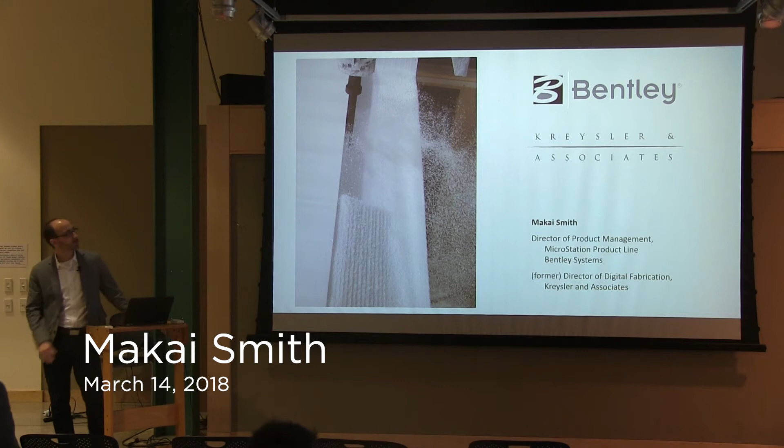So, as you know, I'm filling in for Bill Kreysler. So this presentation will be a little bit bifurcated. He gave me a set of slides. I'll speak to them, and then I'll follow up with a bunch of the work that I did there, which actually now has been almost 10 years that I've been at Bentley Systems, first in generative design and now kind of running our flagship product, MicroStation.

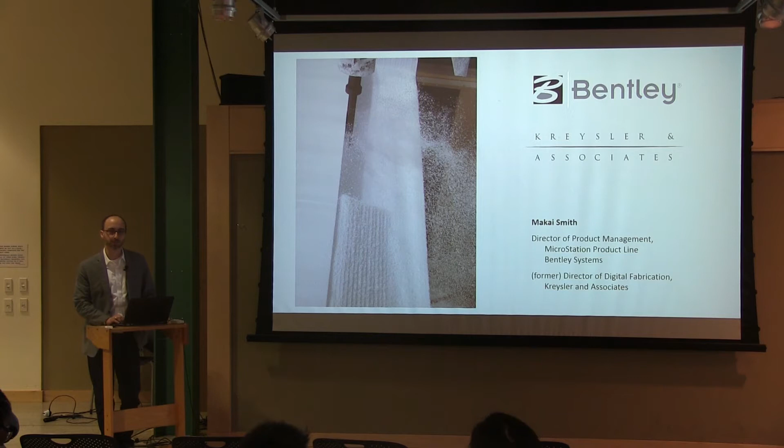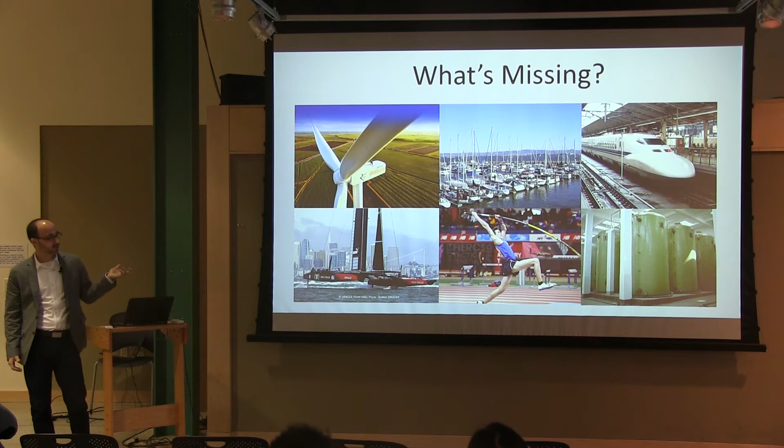So I'll just launch right into it. So you'll see composites have made quite an impact in a lot of industries, and they've found some really good application in things like windmill blades and boats because of the ability to take certain shapes and be resistant to difficult environments like salt water. High performance materials like carbon fiber for pole vaulting and for sailboats. And in industrial applications, these big tanks wound on a mandrel.

But what's missing from this, obviously, is buildings. And it's a shame because the building industry is really big. So there's a tremendous opportunity for the use of composites in architecture. But there's a bunch of reasons why they aren't. And knowing them, thinking about them a little bit, helps open up the possibility to change this stuff.

So one thing about the building industry, as you know, or will come to find out when you go to build buildings, is that they're built a lot like movies are made, where a guy knows another guy, he knows another guy, and pretty soon 300 people are working on a project together that have never seen each other before, and when they're done, they go away and never work with each other again. And so it's a fragmented industry. It's subject to varying different kinds of methods of construction by geography, by the politics of the jurisdiction, and all sorts of stuff like that.

And it's also built to resist change because municipalities are very risk averse, and the governing bodies themselves are governed as much by anything from politics and moneyed interest to councils of people, and you go and plead your case, and they kind of protect entrenched industries too. So getting architectural applications of composites has been slow going.

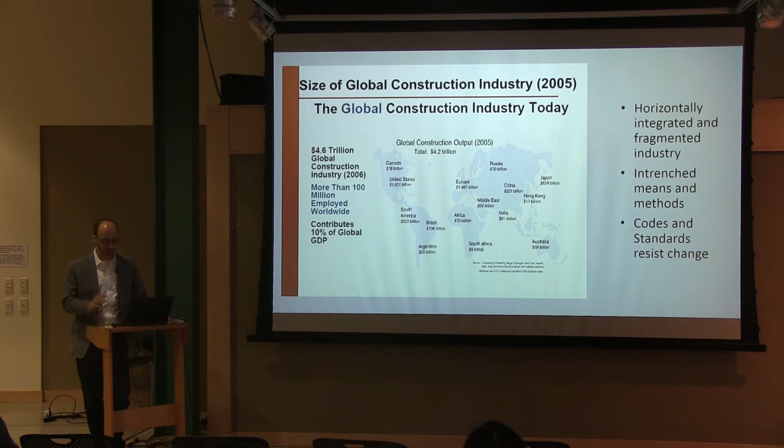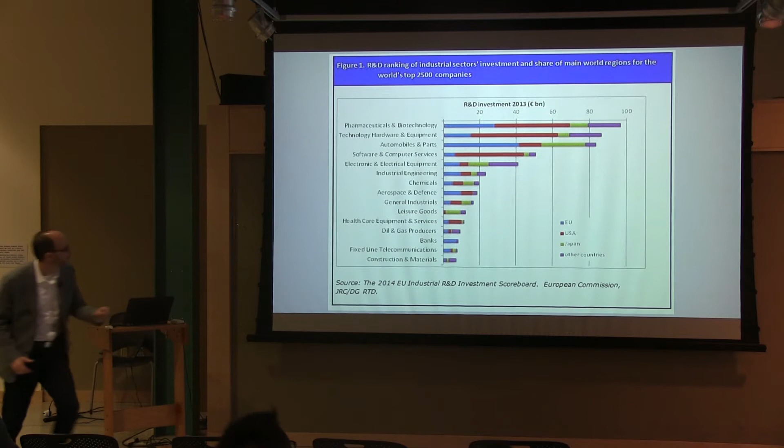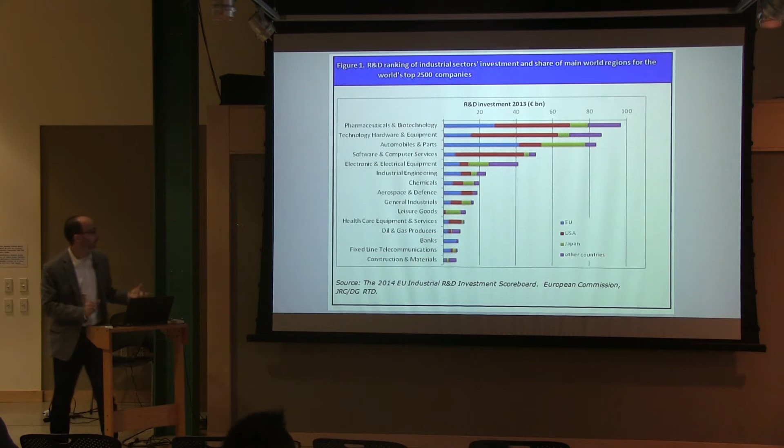One of the problems is that the building industry lags behind lots of other industries in its actual research. This little chart shows the share of R&D by different industries across a bunch of countries, and you'll see, here is the top 2,500. Here's the U.S. So there's a lot of work to be done there, just in terms of the basic research into application of new materials.

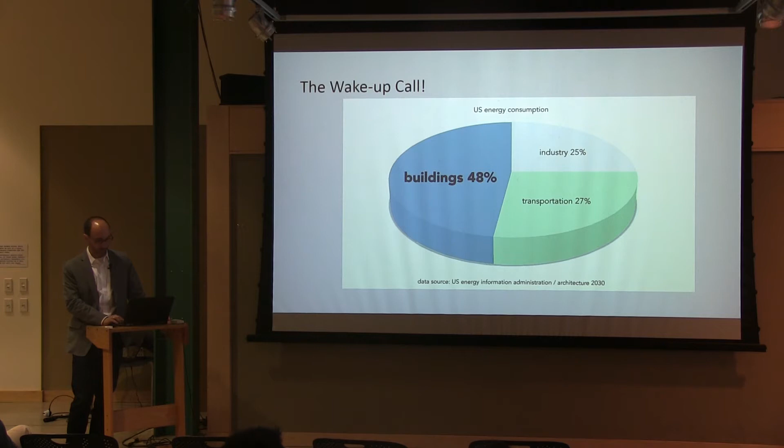And a little bit of the call to action, which is that as an industry, the building industry is terribly inefficient and has fallen off the curve in terms of productivity gains. So, well, why would that matter? I mean, if your firm stays in business and whatnot, why should we want it to be more efficient? One of the reasons is that buildings themselves are really inefficient. And so there are lots of problems to solve, and architectural composites are very uniquely suited for some particular problems in buildings.

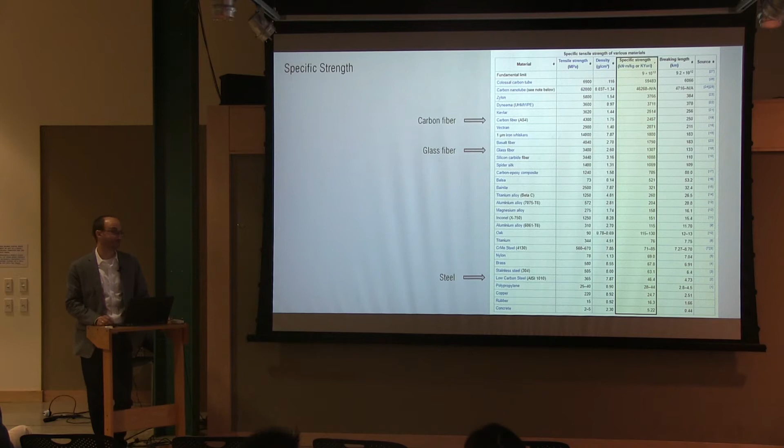So a couple of things about composites. They're incredibly strong, but in a particular way. So this specific strength is sort of strength to weight ratio. So they are very strong for how much they weigh. And just comparing them to steel. Carbon fiber is like the famous one, but glass fiber actually isn't that much worse. It's not quite as stiff, but it's a lot less expensive. So you won't find carbon fiber used much in buildings outside of some of its particular properties.

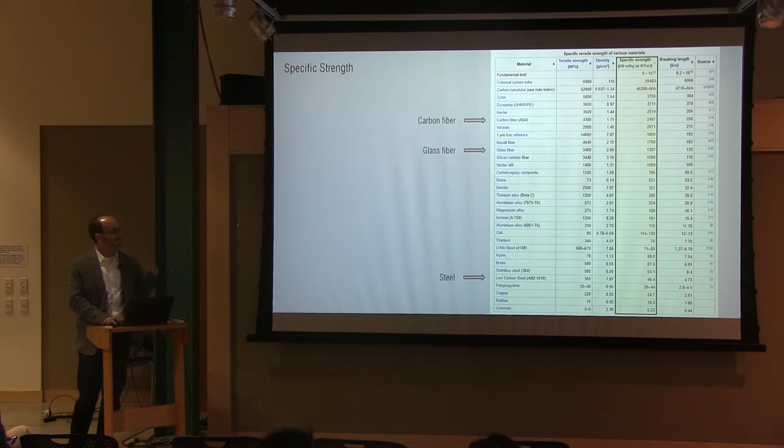The thing to know here, it's not on the chart, but keep in mind, the other thing is modulus of elasticity, which is like how stiff things are. Steel is really stiff. Composites can be pretty bendy. And so the trick is to combine the two and to speak to the different properties of the two materials and smartly design composites, actually being the resin, the cloth, and the structural reinforcing in it.

So Bill Kreysler has been a board member, a former president of the ACMA, which is the composite kind of body, right? They've written this guide, and it informs the building codes, and it's beginning to be accepted. So you are now seeing large-scale application of composites in buildings outside of the anomalies.

So I'll show you a few projects that are in construction or constructed as some examples of good uses of composites. This is the 1000 Museum Zaha building in Miami. And in this case, the design team wanted a composite, so this shell here is composites, right? And the proposal was this backup structure, right?

Because you need it, because it's going to be really wet and humid in this room. And so the drawings that they brought to Kreysler and Associates showed this steel frame on the left. But one of the difficulties, and I'll say this again and again in this presentation, is that this is a material very much unlike most of the other things that the architects have any experience with. So the designs for them can be really well-meaning but very naive, right?

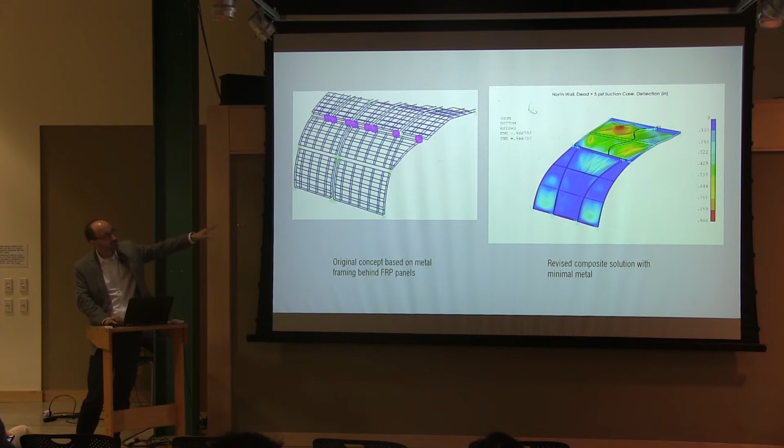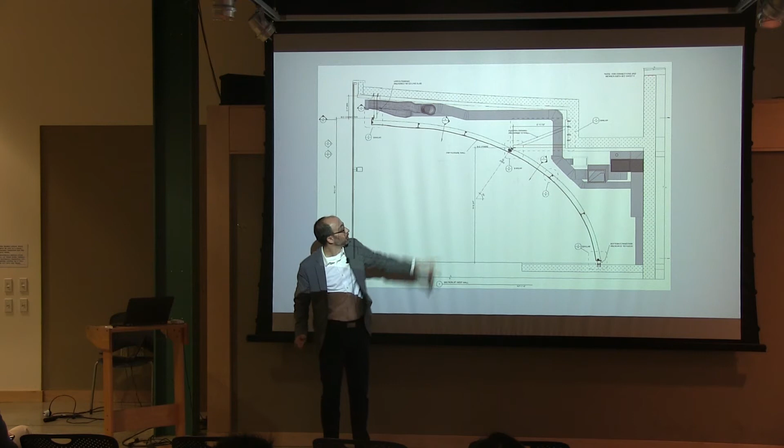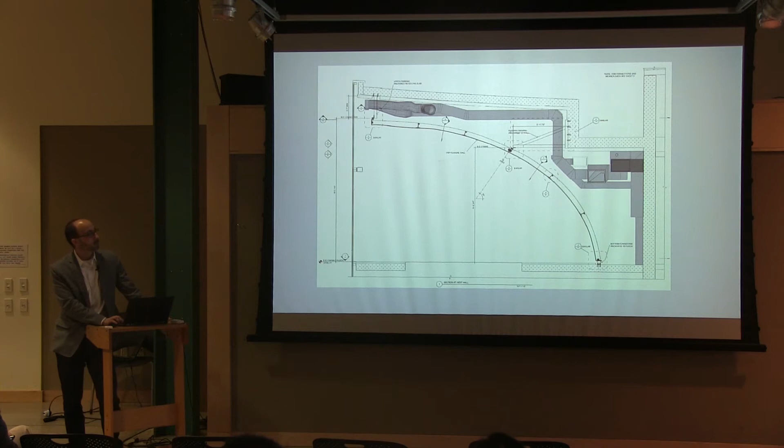You don't need this kind of structure. The panels themselves are strong. So with a little bit of finite element analysis, they got it down to this drawing where you can see the panels span and there's nothing but the kicker, so it's only supported in one place. And the panels have shape to them, so they resist flexing, and off you go. And you saved both construction time and you saved a great deal of steel, which not only do you have to buy, but you also have to support with the rest of the building.

This building also shows a much larger version of the same lesson. This is the San Francisco Museum of Modern Art by Snøhetta, and the contractor is Webcor. And with Enclos, Kreysler and Associates did this facade. And one of the big challenges in composites in buildings is fire resistance. It's a combustible material. You can control it, but you can't get away from it completely. And so sometimes you'll see a glass fiber reinforced concrete, GFRC, rather than fiber reinforced plastic, FRP. I'll use those, FRP. It's an easier way to say it.

But some of the things about this building, it was originally designed by Snøhetta to have GFRC panels because of the fire resistance and because of the familiarity of working with concrete. But GFRC is not strong in the same way that fiberglass is. It wants to crack, so you need a steel structure behind it. So by using FRP, the panels themselves are so much lighter and so much more structural that you don't need a steel backup structure. So they were actually going to have the weather wall, an air gap, an outboard steel structure to support a set of GFRC panels.

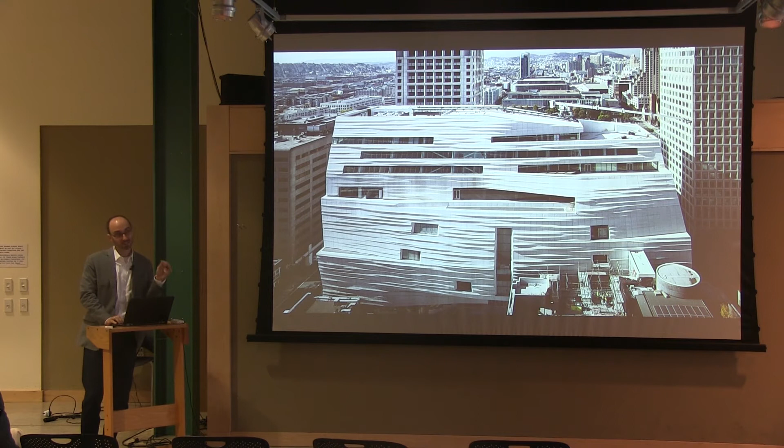And the tower crane can reach farther, so you don't have to move the tower crane or build as big of a tower crane. And Enclos did modular panels, so the FRP is not separate, it's with the interior panels. So Webcor only had to go around the building one time. The whole facade was put on in a single piece. So in a congested site in downtown San Francisco, you don't have to stage something twice. You don't have trades running into each other. So oftentimes it's the system effect of using a material like this where its efficiency comes, because it might be more difficult to do in some ways, but you just have to know where to apply it.

A couple of other applications. Here's the Bing Concert Hall. All of the interior panels are FRP, and they're backed up with concrete, so they pour concrete into the molds before they're demolded in order to get the acoustic performance of the panels.

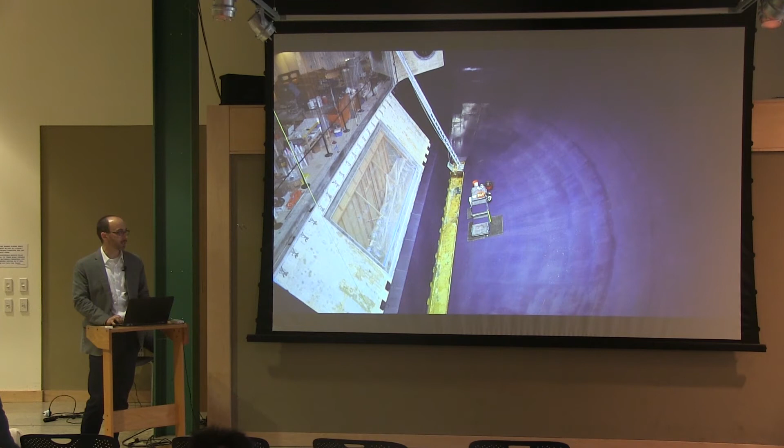This is the Monterey Bay Aquarium, and the interior of this enclosure for sharks, I think, is glass fiber reinforced polymer. And instead of filling the resin with talc, as is often done to make it softer and more workable and less expensive, it was filled with a harder mineral so that it can stand up to the scrubbing that needs to be done on the inside of tanks. So the material itself can take on a great number of characteristics by what you do with the resin.

So a few projects that are in proposal or on the books or in construction. This is a rendering of a boathouse in Tulsa. And oddly, Bill said this is one of the most difficult projects that they have ever done, because this wireframe, this is a rendering. That wasn't built. So all that's actually there are the columns and the panels, which means the panels span a couple of bays between columns.

So the panel joints are structural, like semi-structural, and so they're having to figure out all the deformations of it. No two panels are the same. So you can make this stuff as complicated as you want.

Another interesting project, this project went on for a great while. I was at Kreysler & Associates during the time it was in design, and they finished it just after I left. This is a private residence on an island in the bay, and it's a monocoque structure, so there's no interior structure. If you went down into the hull of a boat, you wouldn't find columns, right?

The shell of the boat is the structure of the boat. So like the piece on the right, if you flipped it upside down, it would float. It's like that. It's like a single fiberglass structure. So you can do monocoques if you're able to design them and if you're able to get them permitted.

This is just a research project done at CCA. And what they discovered here was that you can get different kinds of marine organisms to grow by the shape of the underside of this piece.

A piece by Achim Menges, I think it's a pavilion in Stuttgart, and these are ETFE panels. I think they're thermoformed, and then he's laying the fiber, this is like carbon fiber tape placed by this robot arm on the inside, using the bubble as a formwork, inspired by, I think, these spiders that blow little bubbles and then build a web inside them.

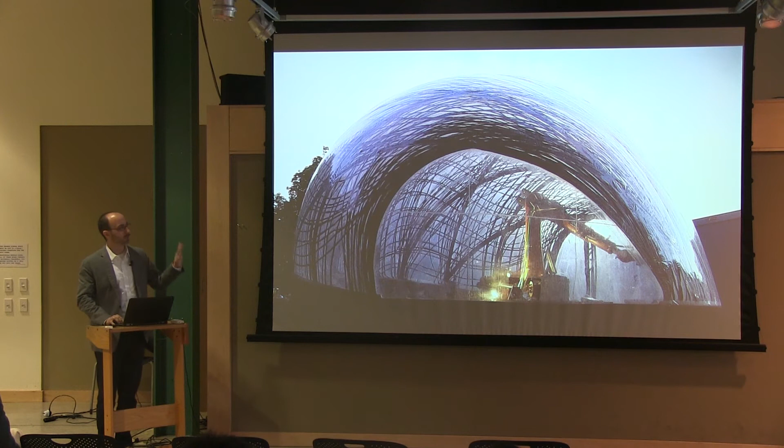So it's a very adaptable material that can be placed, you can put the structure exactly where you need it. That's, I think, the lesson in this, right? One of the many lessons. And this is a project that's on the books. It's going to get built, the Lucas Museum of Narrative Arts.

And I wish these renderings showed more closely the surface finish, because it's going to be essentially a glass terrazzo. So the gel coat, we'll get into what gel coat is in just a second. The gel coat is going to be glass and then done like terrazzo, so the whole thing will have a real shine to it. The rendering actually is sort of accurate in that case.

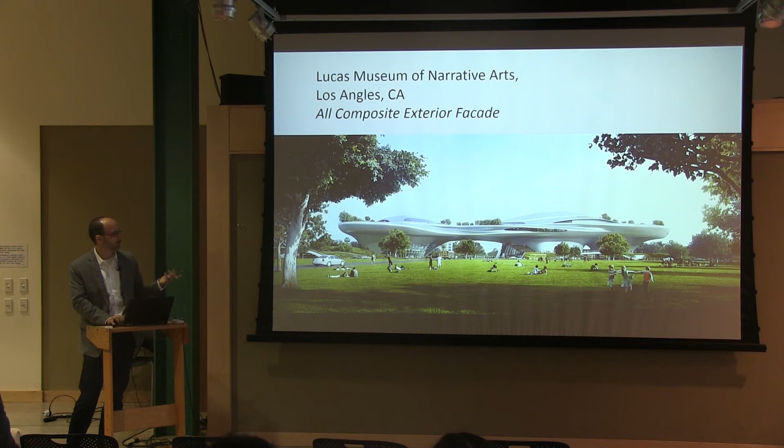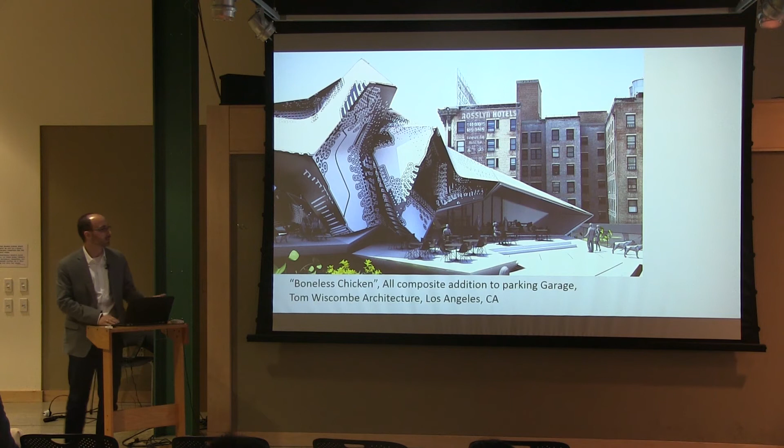And Tom Wiscombe's boneless chicken, again, why have an interior structure when the shape of the thing and the panels themselves can be strong? Especially when you want to put this on the roof of a parking garage and the existing structure isn't built to carry the dead load of another building. Well, then the building needs to be as light as an airplane or a boat.

So now for the benefit of those of you who haven't spent a bunch of time in a composite shop, I'm going to go through some projects in kind of gory detail to show you what's involved in them, the kind of combination of the real high tech and the high touch. So this first project is a lantern. This cocoon-shaped thing in the lower right is a lantern for this house in Southern California. And this is the drawing that was done.

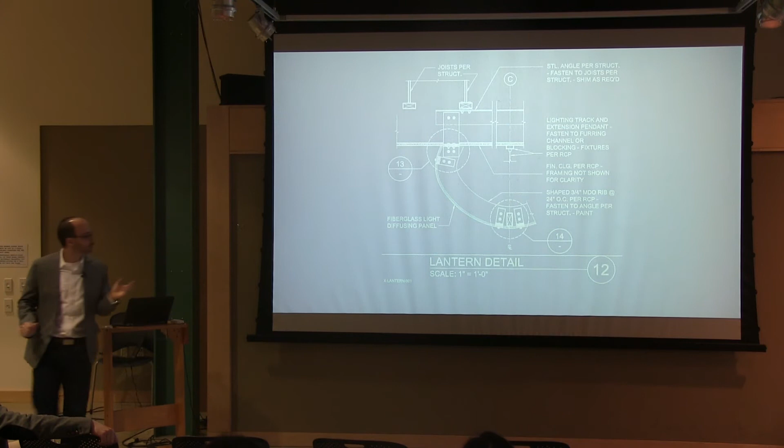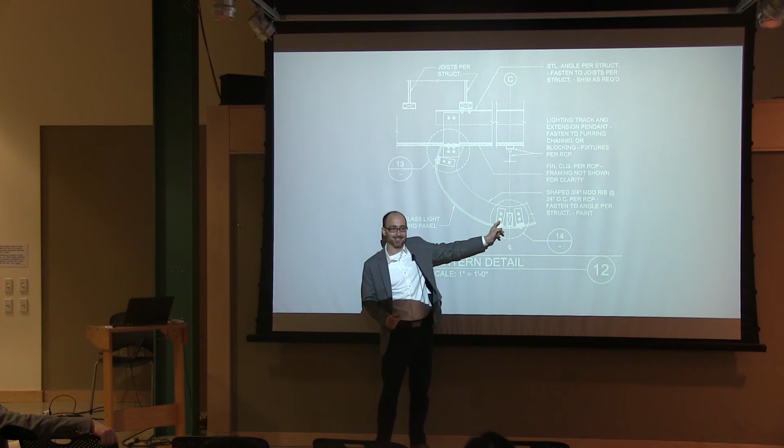And it just shows this kind of typical thing where, so here's the composites, and here is this clip with a piece of dead wood in there to join the two pieces. It would cast a shadow, these huge clips. And it's just not necessary. That kind of construction isn't actually how you build them.

What you do really is you use flanges. A real convenient thing is to have keys between the flanges so the panels line up. And especially if you cast one panel against the other panel, they fit perfectly. You build them together, you take it apart, you put it on site, and then they go right back together.

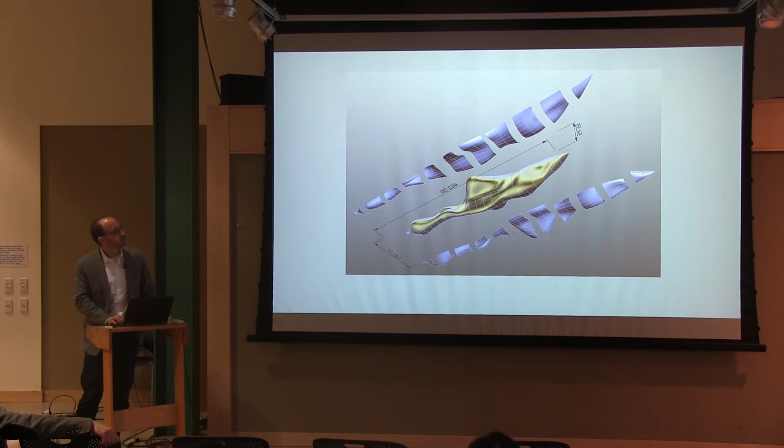So took the lantern, sliced it up into its component pieces, splayed it. Then those are the flanges to the outside so that you can get to them and assemble it. So it's just one view of it. Chop it up, and then, it's interesting how much modeling contractors and fabricators actually have to do. In this case, there was more modeling of the thing around the thing.

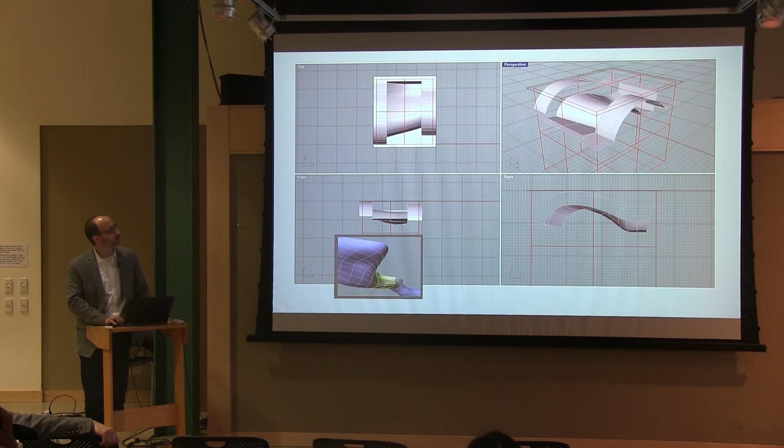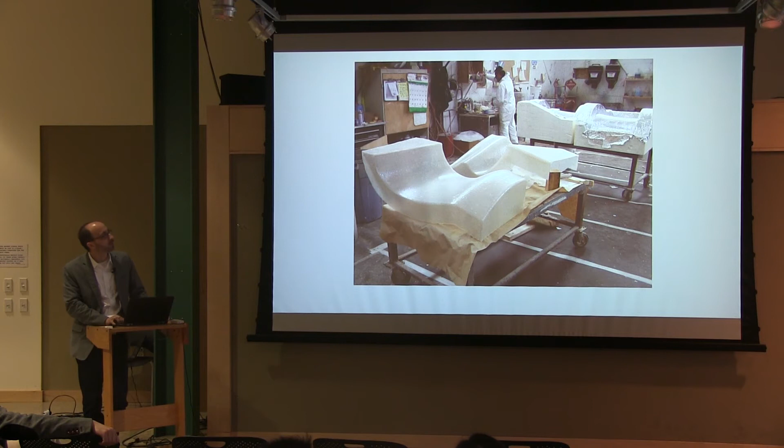So the formwork for some of the individual pieces milled up. Here's the piece, different parts of it before they've been trimmed. And then the production run of the molds.

So you'll see this technique a few times. So I want to give away a secret. You can use this one. So polyester resin has as one of its component parts styrene. The white stuff is expanded polystyrene foam, which means your polyester resin will eat it like you were pouring gasoline into a styrofoam cup. However, spray mount and a roll of aluminum foil from the grocery store is enough to protect the EPS from the resin long enough for the resin to kick.

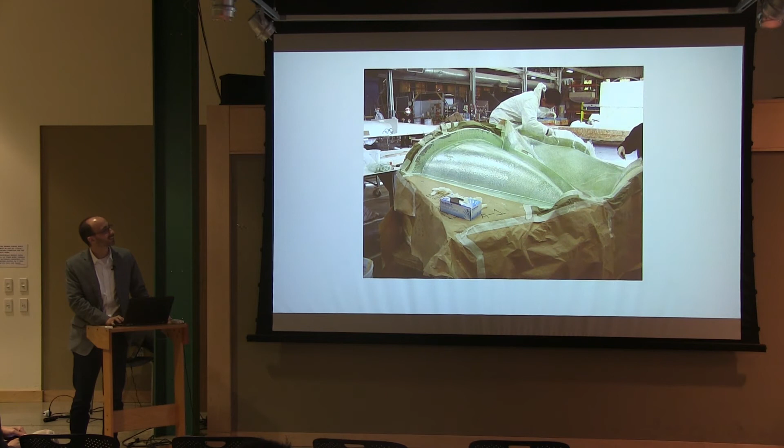And all it leaves is these paper-thin joint lines between the pieces of aluminum foil, which you can buff out if you need to. And you saw by the size of the pieces, the cost of the foam is a significant part of the mold making. So off you go, a whole lot of foil. Sprayed with the PVA release agent. It's cold enough in the North Bay area where the shop is, just south of Napa, that you need to heat the pieces up to get the resin to kick in the winter.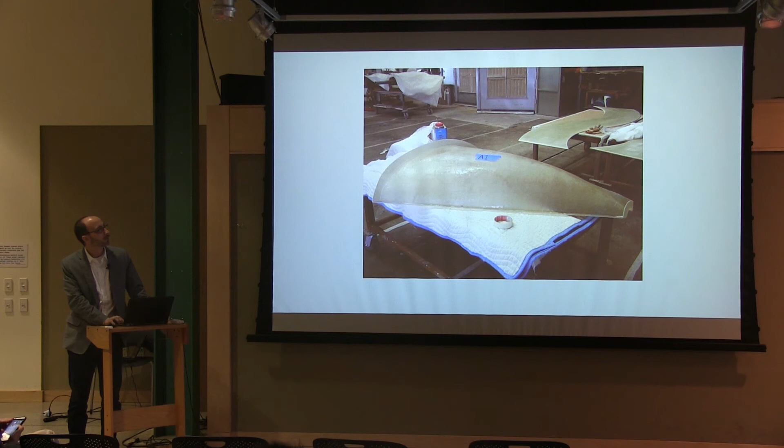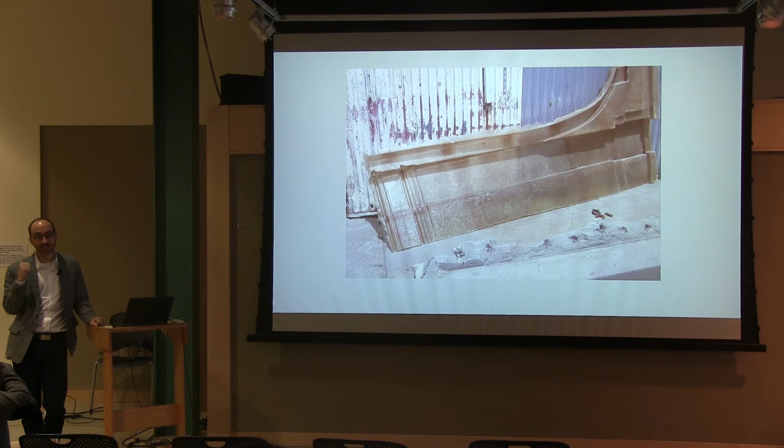And there they are. Now, let me take a quick digression about this. So it's a lantern, and Greg Lynn, you can imagine, has a very finely honed aesthetic. And the fabricator's in the job of finding a thing which matches that aesthetic. However, it's an interior piece, and it has to look perfect. But walk outside, and we had leaning against the shop this piece. So this was like, the Greg Lynn piece was probably $15 a square foot, and this piece might be $2 a square foot.

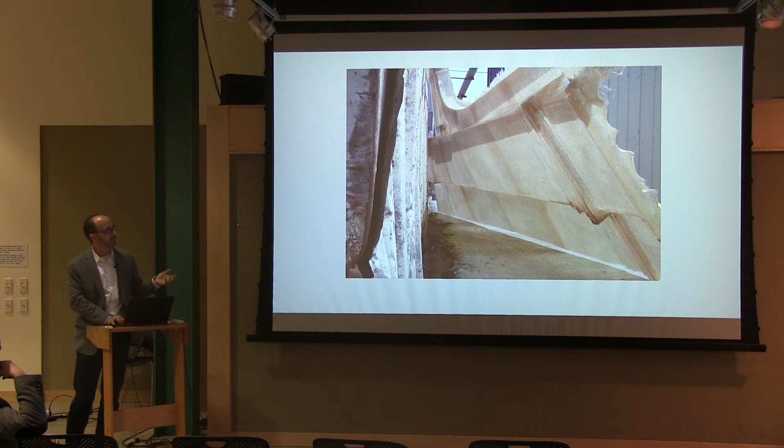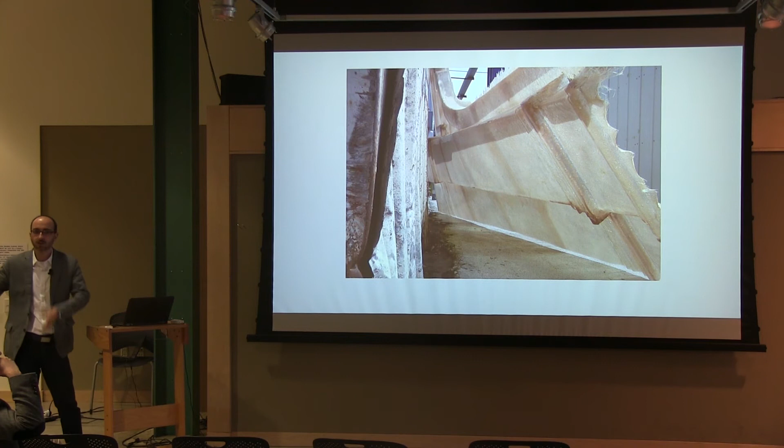And the difference is the quality of the glass, the amount of time you took, these intumescent coatings on it and stuff. So if you're willing to take something that looks like this, you can drastically reduce the cost, but you have to kind of know the aesthetic of it, like how the cloth is going to be laid in it, as opposed to the lantern, where you have to take the cloth and tear it into all these little pieces and put it into the mold so that there aren't the lines of the strips of the glass cloth put into the mold. So here's some shots of the completed lantern.

I guess the whole talk, maybe every talk, is a digression on something. Here's another really interesting technique I just want to share with you, just the reminder about how much pressure the atmosphere can apply on something. Kind of steal from using veneers for furniture making. This was a prototype canopy for a large coffee company to cover their drive-thrus. Didn't go through, but we made this one prototype. And one of the challenges is to make flat panels rigid, you have to put a core in them. And to get the core to bend to a curve is difficult.

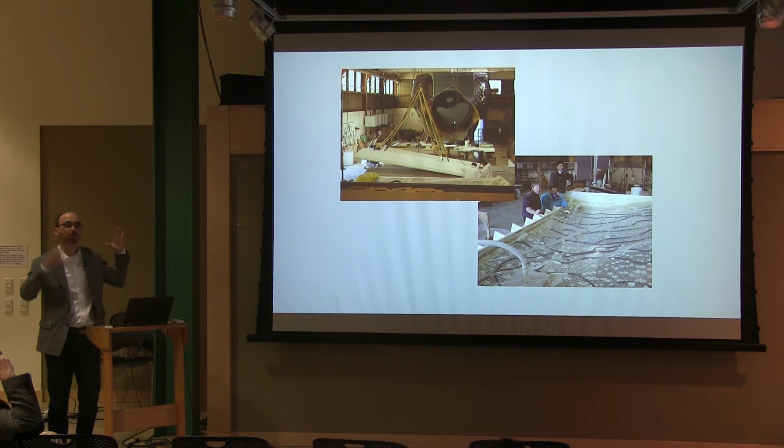So in this case, it's a bunch of shop vacs and visqueen to just vacuum bag it using a plastic from Home Depot, essentially. The rope is in there to let the air escape and be collected up by the vacuums. So it's makeshift is kind of the point there, right? There were half a dozen shop vacs running simultaneously to pull enough vacuum on it. But the shop vacs and visqueen from Home Depot, just like you could use in the studio. One of the things about composites is that it might be one of these last frontiers where a lot of the tools and techniques that go into it are at your fingertips. They're things that you could do and stuff that you could buy.

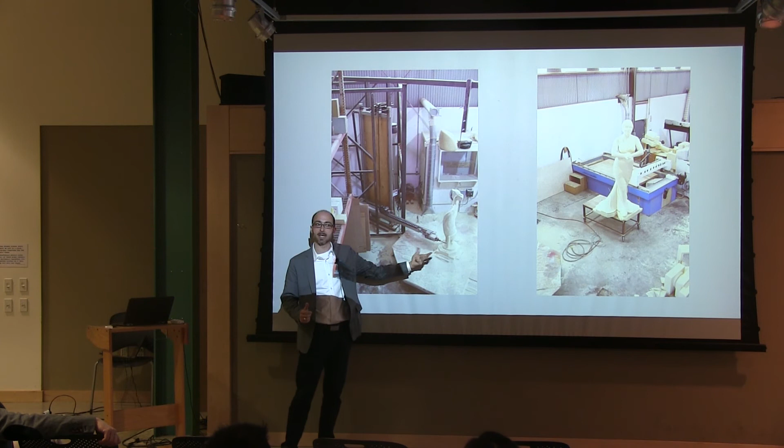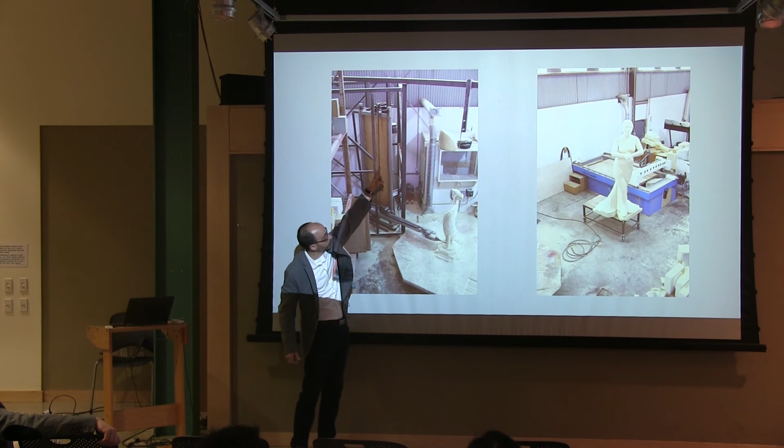I guess at the time this machine was constructed, maybe it was at the limit of what you could do. Now, especially with where DIY has gotten to, RepRap and Arduinos and stuff, a lot more servo control stuff is right out in the open. But it really struck me when I came to Kreysler & Associates. This is a machine that was there when I got there. This is a vertical mill. You might just like to know what this thing is, actually. So we've got X, Y, and then Z is turning the table. Roughly hewn steel structure, counterweight from the sporting goods store. And the bearing was a salvaged bearing from an old crane.

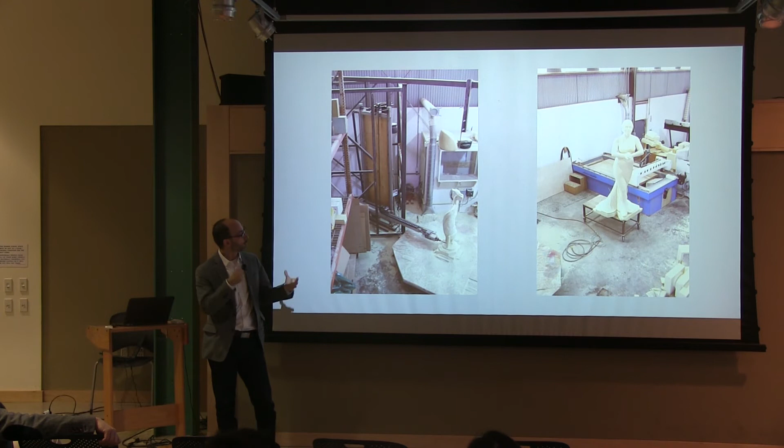And you can only imagine how much slop there is between that bearing and the pinion gear that runs it. Despite forcing the pinion gear so far into it, it distorted the plastic. But the trick there, of course, is you don't have any backlash if you only ever run it one direction. So always spiral it around the one way. And even at 8 feet in diameter, we could get it down to about 1/8 of an inch in tolerance. So, is that good enough? Well, it turns out for artists, it is. So the side business at Kreysler & Associates, especially at the time, there was a certain time in foundry where it was really hard to go from a maquette, a small carved wax or clay.

We would laser scan them, and then we would use this machine to mill them out. So that's like twice life size. And then we'd send them to foundries to be turned into bronze. And it was interesting because we sharpened our tools on a lot of curvaceous kind of forms that were making their way into architecture. Turns out to be a lot of the same techniques.

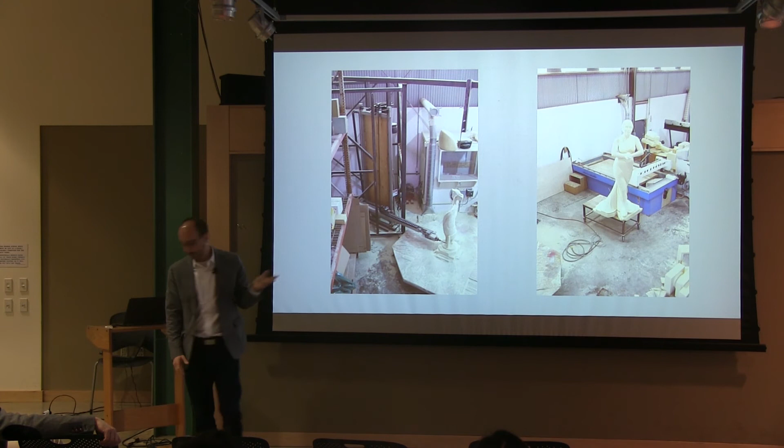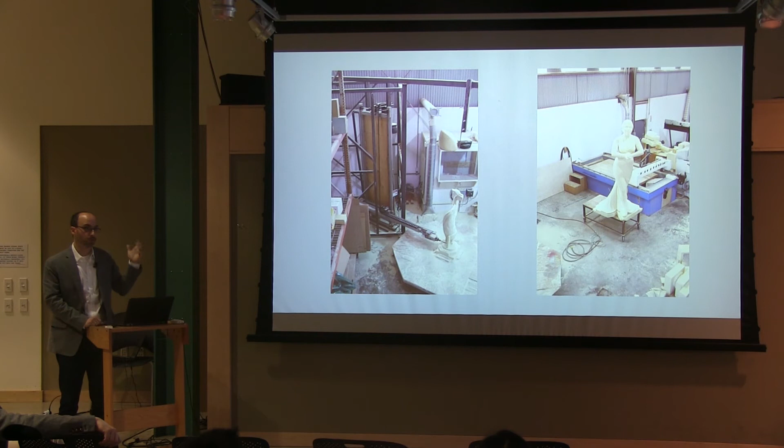So some of the content was a little like, do I want to really do another equestrian? But actually, you can learn a lot from that. And one of the things that I learned was making the tolerances of the techniques suited to the budget of the artist or the architect. Because this machine could not mill a turbine blade. It's not precise enough. But if you go to an aerospace manufacturer, they're going to charge you $250 an hour to run their mill. I can run that thing for $50 an hour.

So it's definitely about making your own tools. It's how I met Bill Kreysler and came to work there. Today is probably a very unusual day. Alexander, this is probably the first and last time that sand printers have been shown twice in one night. This is a project that I did as a collaboration at the studio at SIGGRAPH, and it's how I met Bill. They built the rig, and I wrote some code to turn images

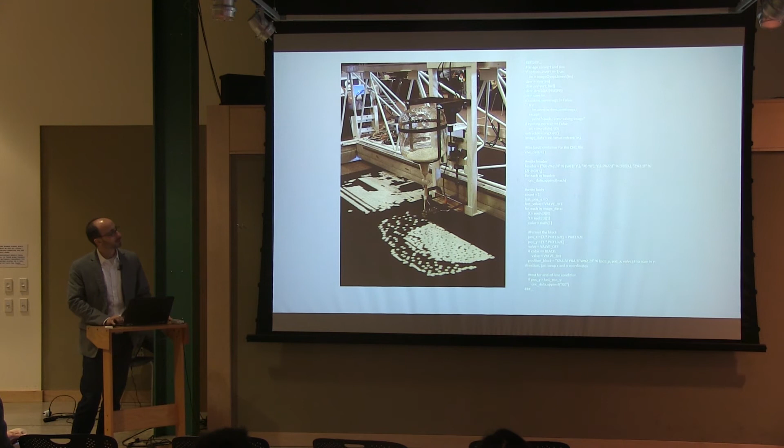into pixels and then write them out using G-code so that this machine can understand them. Again, avoid the slicer and go directly to the code, because you can do funny things with it and get it to do it exactly the way you want it to. So this is kind of a concept piece, because the edit tool for these images is the whisk broom, and off we go and we can print another image. But it was a real aha moment in terms of completely taking on the production of the object by making the tool all the way up.

So when I got to Kreysler and Associates right after doing that project, we commissioned another big mill, and one of the most interesting things I've got to do was to build this machine that you've been seeing making these big molds. But again, if you're going to be making a machine that's not particularly precise, it's pretty interesting what you're seeing here, the commissioning of this mill. It has to be calibrated in the first place before it can mill a perfectly rectangular Cartesian space.

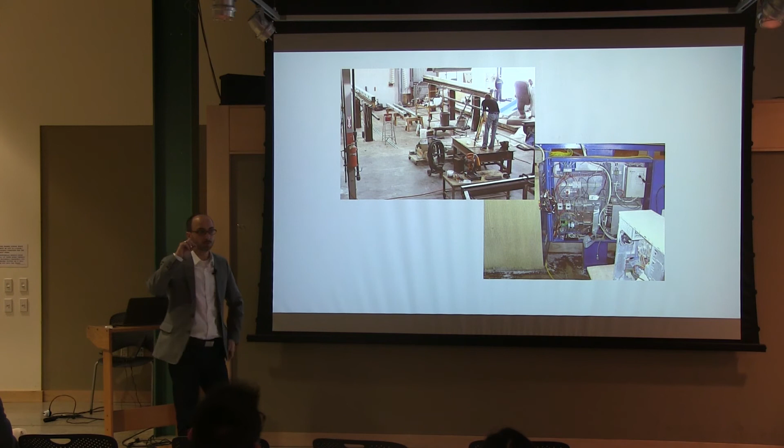So that is like a surveyor's transit. And even with that tool, just an optical transit and a machinist's square, we were able to sight from across the room, like split the 30 seconds on a machinist's square, and then do it across the machine, and so you know the machine is level. And that's about the truest space you'll get.

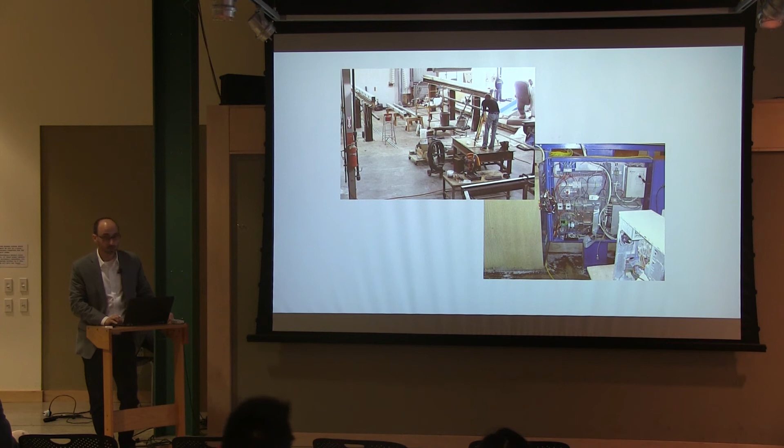It turns out in the fabrication business, that thing of what is actually flat, what can we measure from in a room that has a rough-hewn floor, like even the steel tables that you'd place down aren't actually flat. So maybe the first thing you do is put down foam and mill the foam flat. Now you have a table, and now we'll put the thing on top of that. So if you're brave and willing to think your way into and out of lots of problems and willing to take on all that risk yourself, you can do kind of amazing things. And this is that machine milling away.

I put this in there as the counter example. A couple of lessons here. One of them is if you have that sneaking suspicion that something might be dangerous or fragile, I want to encourage you to listen to that voice and to do something about it. This machine had the odd capability that the ball screw for the z-axis couldn't resist gravity, so when the power went out, the mill would plunge.

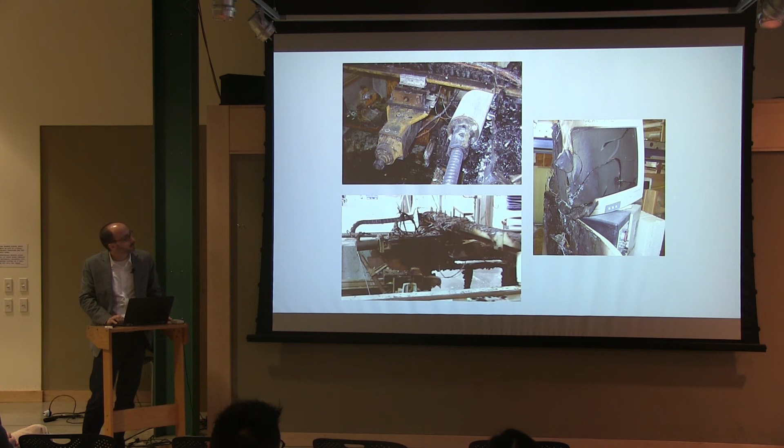And the switch for the drill bit for the tool would turn on when the power went back on. And so I think it failed sometime during the night and burnt itself up. It actually vaporized some of the aluminum structure in it. That's the temperature at which polyurethane burns. So I don't know, this is kind of an amazing thing to see.

So, okay, just a couple more pieces. One of them, I think it's been interesting to see this, like the big Delta machine trying to 3D print at scale, right? But it's really difficult to build a house or something at that size because you want to do this pristine thing all in one pass. The truth of it is, I think a lot of the time it's really composite in a general abstract sense, that you're going to make a thing out of lots of things.

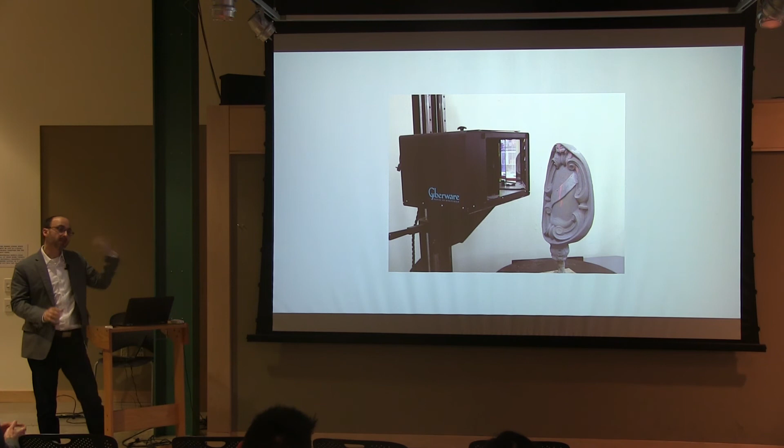So actually, it was easier to cut it in half, mill it, sculpt the model, scan the model again, and then use the scanned maquette to make a mold, lay some fiberglass up in the mold. But the top is in round, the top is perfect. So why even do anything with it?

Take a silicone mold of the top, and then do like they did in ancient Chinese bronzes, which is to take a piece, cast it, and put the cast piece in the mold when you cast the next piece, and build up complexity. So here you have three or more different mold making techniques, some digital, some really old school. And the back, this is a piece of plywood, just molded onto that. So there's that piece, it's on the porte cochere in front of this hotel.

So I don't know if any of you have been to the Denver Convention Center, but this is a project that Kreysler and Associates did for Lawrence Argent. And it's just the most incongruous thing to see, especially driving down the road, one of its legs, like this big chicken leg. The head, by the time it arrived a couple of days later, the truck drivers had drawn the eyes and the mouth back on the shrink wrap around it.

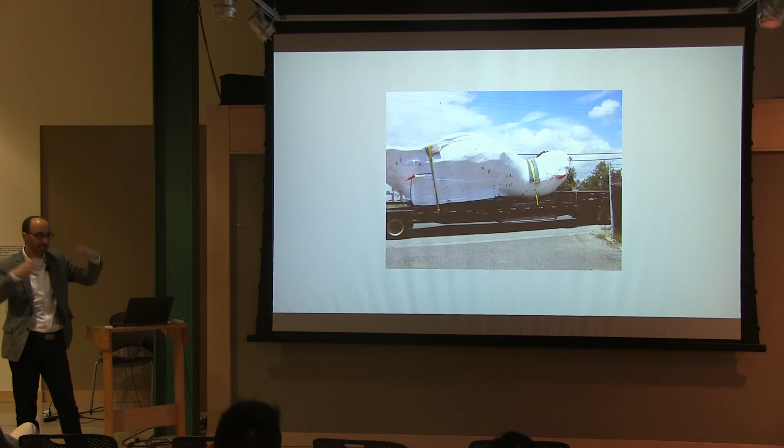So the thing shows up on site. How did it get there? Well, it got there like this. Well, how did it even get into those pieces? Well, here's one of the panels. And you'll notice it has to be made up of lots of panels. But look where the flange is. The flange isn't at the panel joints. The flange splits the panels because then the panels are strong. So you'll build it one way and then you'll take it apart a different way.

So those flanges I showed you at the beginning, this is the inside of the bear. So you've got what you might call a bulkhead in a ship, circular, sort of laying on our back, looking up into one of the bear's legs. So you'll see there's a panel, and the panel actually spans the disassembly joints.

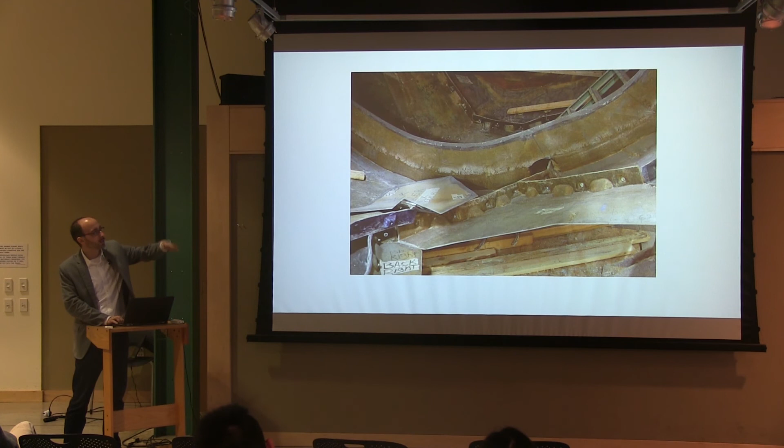And you know, you're looking at a bear and you're looking at sculpture, but these techniques in terms of how panels go together and how you negotiate the structural exchange between the panels, it's directly translatable into how you build panels for architecture.

And using 3D printing in the construction industry, I think this has been one of the biggest benefits I've seen, actually, is the 3D printed model that lives in the job trailer, because it's way more descriptive than the construction documents in terms of a crew figuring out what are we going to do today, and everybody puts the 3D printed model on the conference table and Sharpies on it.

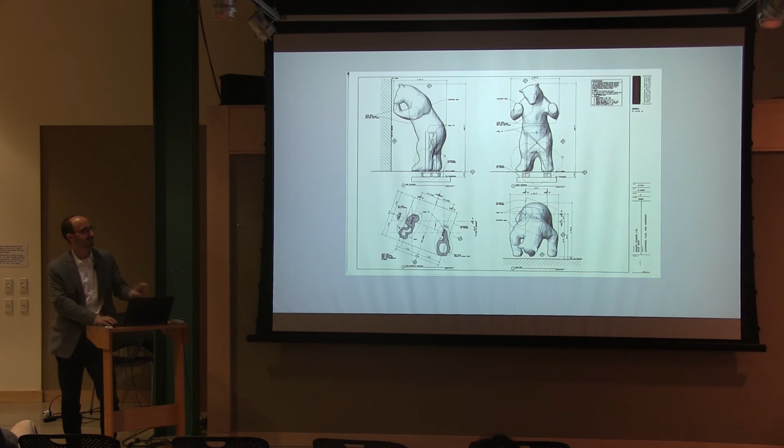Actually, a mistake was made. Remember I showed you that transit? I only wish that we had used a transit like that on the machine before all the panels were milled. Because it turns out the z-axis of the machine was ever so slightly canted in 2 dimensions, which meant that it was milling a parallelepiped rather than a cube.

You don't know that, so you build the whole thing, and guess what? The bear isn't standing like this. He's actually standing like that. That same transmogrification was built through the whole piece. So after it was put together, it had to get fixed.

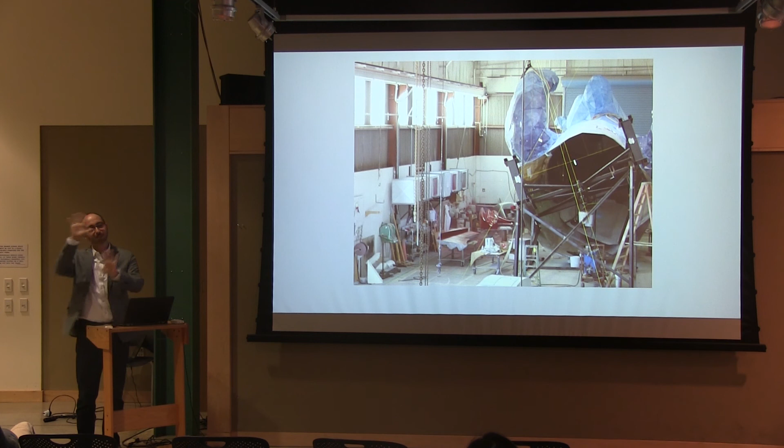Fortunately, again, you're going to take on all the risk, and you know how to get yourself both into and out of the problem. So see the string lines? Those represent the ground and the face of the convention center. So then it was mock assembled within space, but you can't actually tip it upright in the shop. You have to lay it on its back and then construct space around it, and then fix enough of the panels so that it doesn't actually lean through the glass.

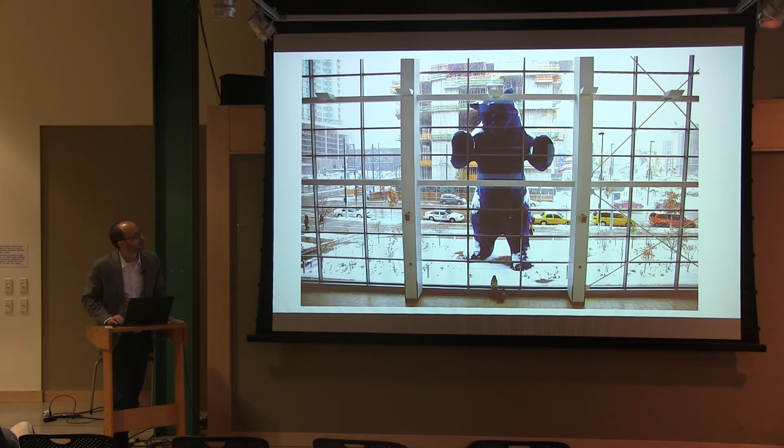I think we used up our contingency on that. But it's pretty cool to see. Some more ripples made real. I put this in there again because it's kind of like the fabricator's lesson. So often, the fabricator is the reality up against which the design bumps.

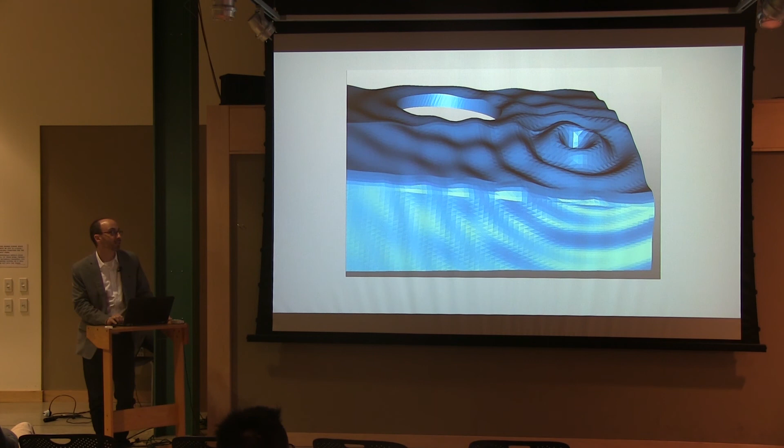This is what the designer saw. This is what I saw. And despite my urgings to turn off smooth shading in your display, I never did get a properly smooth object. So there's the smoothing. It's called a pneumatic orbital sander.

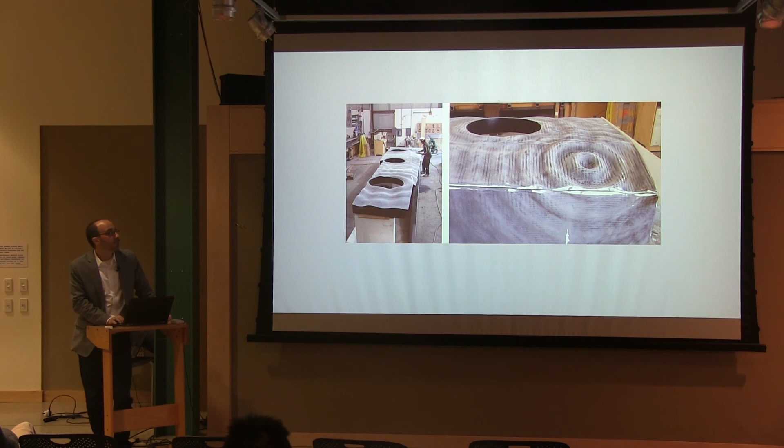Until the point where it had to be sanded that you go through the nice, expensive blue gel coat into the composite behind. So it's a good thing that they know how to do some really nice finishing, because then we sprayed more gel coat over the surface and the piece came out just fine after a lot of hand labor. But the lesson is to take the digital seriously, because in digital fabrication, it's not an abstraction, it's an actual thing. Triangles are things.

I guess the bear is just lurking in the background always in its pieces. So I just want to show this to you because, again, this is another one of those techniques to take away with you. If you're ever making molds of things, panels that need to go together, here is actually that technique. So the molds were made, flanges were put on after using plywood because it's easy. Why mill that stuff? A piece of flashing from the hardware store, you can slide it down into the foam. There's an instant flange with little blocks of foam as keys to lay that up.

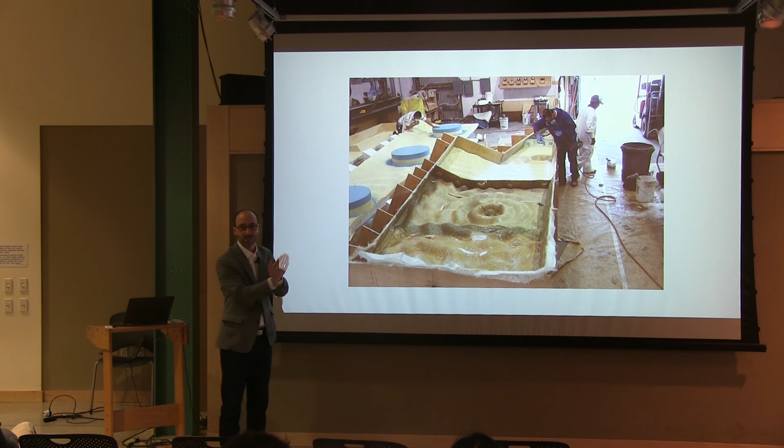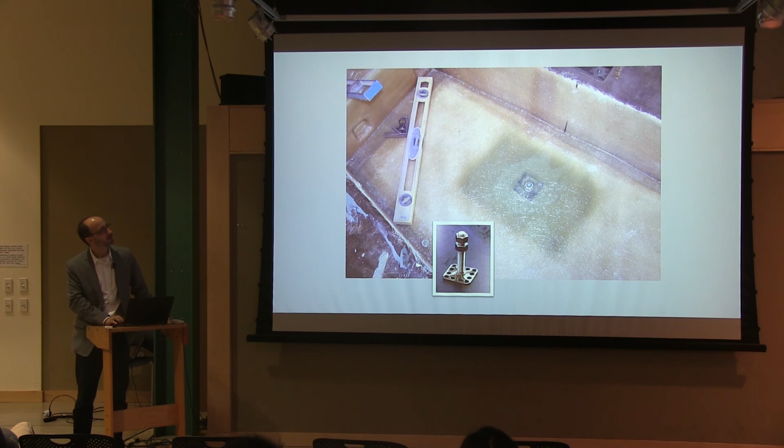When fiberglass cures, it shrinks, and you'll get like 15 degrees that the flange wants to pull back the one direction. So lay the next panel up against it, and you've absorbed at least half of that flex. So now you're down to 7.5 degrees. And that's within the range with which a bolt can just cinch the two panels together, and actually nicely tension one against the other. So there's the how-to of actually molding panels. Little embed fasteners. Thread in after the fact so that you can stack the piece without it scratching another piece.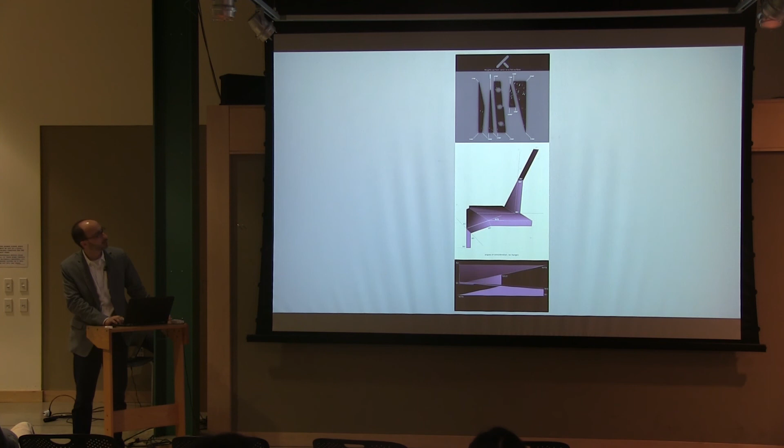This kind of ridiculous drawing that looks like it should be a shop drawing but was ignored the moment it was shown because it shows neither how to build it nor really what it's going to look like. This, the actual shop drawing, which is just Rhino.

How to measure: the shop drawings had angular measurements on them, but to the fabricator that's useless, because angular with respect to what? One of the orthographic planes? That's not useful. I need to know with respect to the fold, right? So leave me a coordinate system in the model that I could look at to see.

What we actually ended up having to do was to draw them all so that we could build a custom crate for them to ship it. Again, it's one thing to build something, it's another thing to get it on site. Even at scale, that's still the same thing. So I'll leave you with this project.

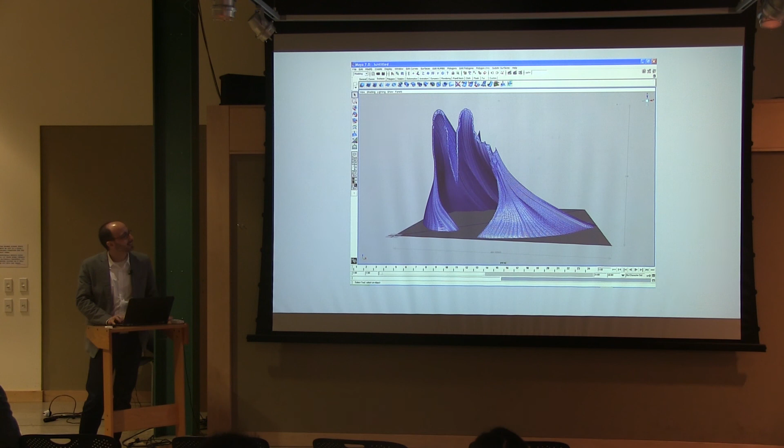The sculptor is actually an ad exec by day. He's the one responsible for the King, the creepy Burger King head. That's his ad campaign. So it was a concretization of light, is sort of this piece. In building it to be assembled and then disassembled, there are some really nice details in it, actually. How these panels come together.

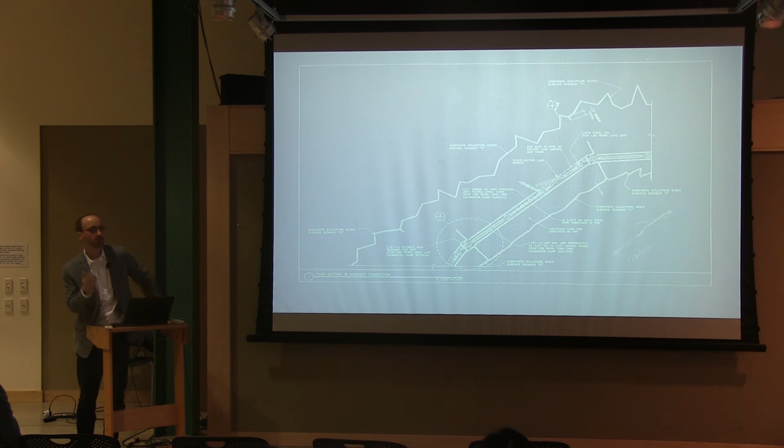There's an embed system with a post-tension chain, so you can reach into the piece and then latch one panel to the next. So there are the tendons that run through these tubes that are cast into the piece.

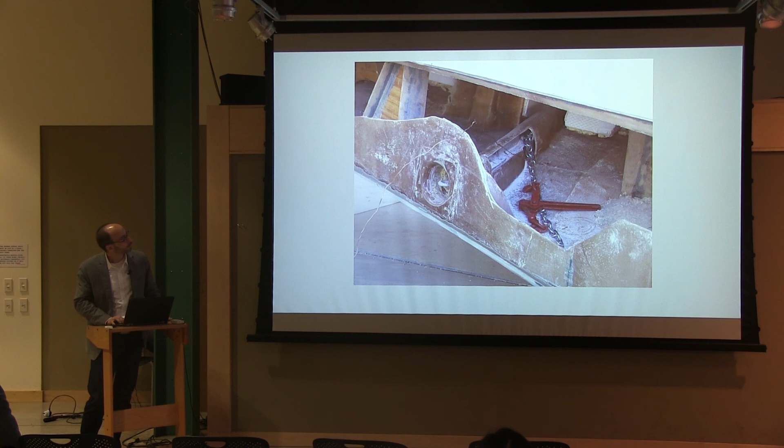So here's that lesson again. So we get this model, and we're going to build it. And here, do it just like this, and here it is, and you look at it. But who's going to go over every last triangle of a mesh? I mean, the same thing can be true of any kind of digital representation of a building that's ever detailed, where we get down to the level of the return on the flanges of something. A triangle doesn't tell you who looked at that triangle to say that it was in the right place.

Increasingly, that kind of, you might call it PMI in the mechanical space, the manufacturing information, that's like managing the whole information chain on stuff. Increasingly, models can become information rich, and I think it's one of the promises of BIM in a way. But we've got a long way to go, and this is just a perfect example, because when you actually looked at it, these were overhanging, and the triangles were like an inch in size.

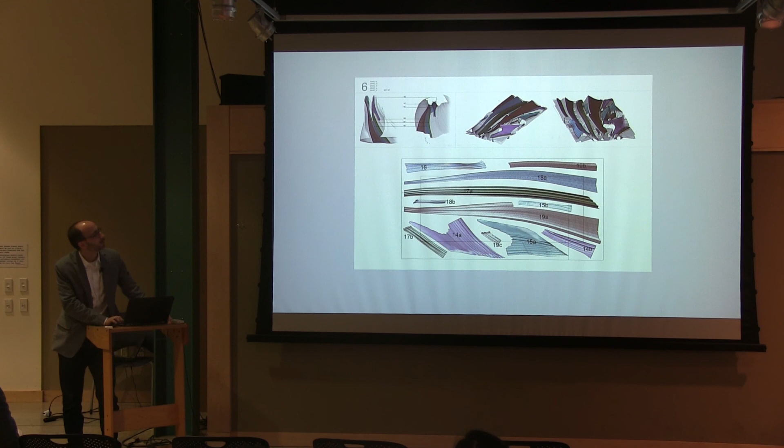And so really what they do is they just shadow. If you're going to do 3-axis milling from the top, you just ignore the overhang. And so long as you can get signed off on it, that's cool. So here's just that thing at scale. This was actually the first time I used Generative Components to try and do fabrication planning. The aesthetic of this should show you what year it was. GC is a precursor to Grasshopper and Dynamo.

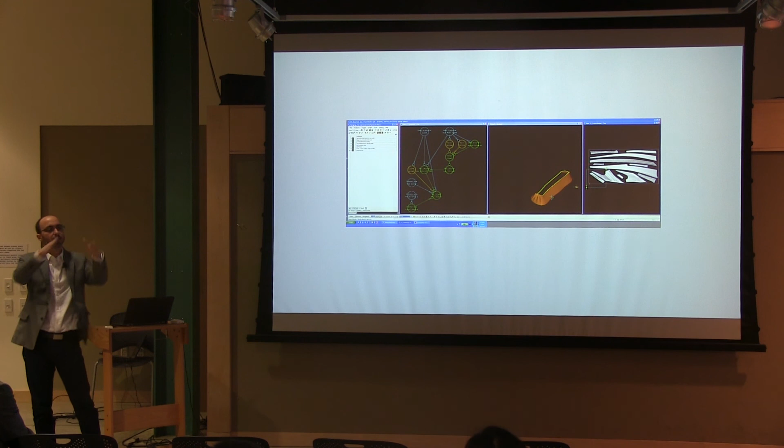It's kind of nice if you can capture the flanges around things. If anybody's done milling, you know, as soon as you roll off the part, the drill bit wants to plunge, and when it does, the collet's going to collide with the part. So you have to make these nice, gentle slopes around things, and that is really labor intensive if you have to do it manually. So why not capture that logic and just apply it algorithmically to the part?

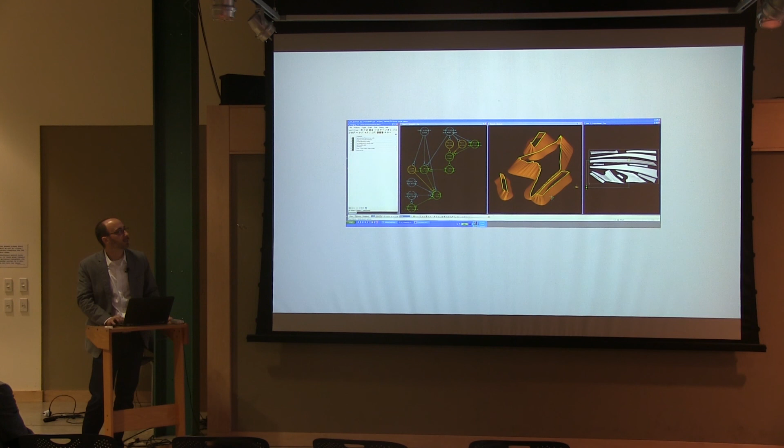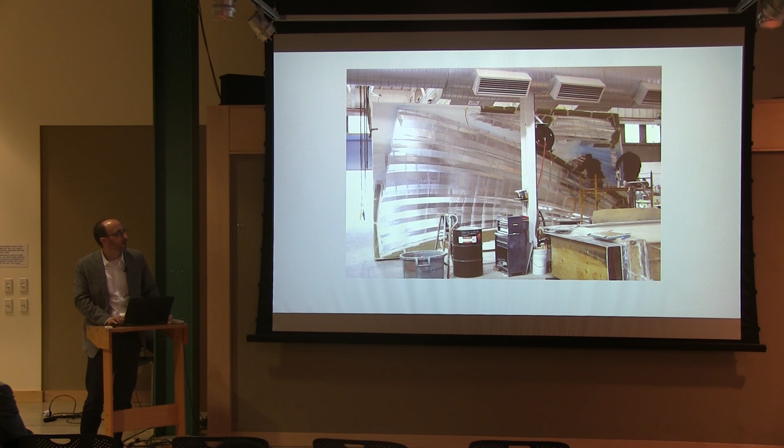So that's what we did, and wrote out so many tool paths in this big machine. These molds, you have to lift them off with a crane. And a lot of aluminum foil. Again, just matching the cost of the material and the level of accuracy to the project. So I put this in there because I only wish this is what you get, right? Vacuum bag these big things, and you can't smell the resin or anything, and the resin just goes through the cloth, and boom, you got a part.

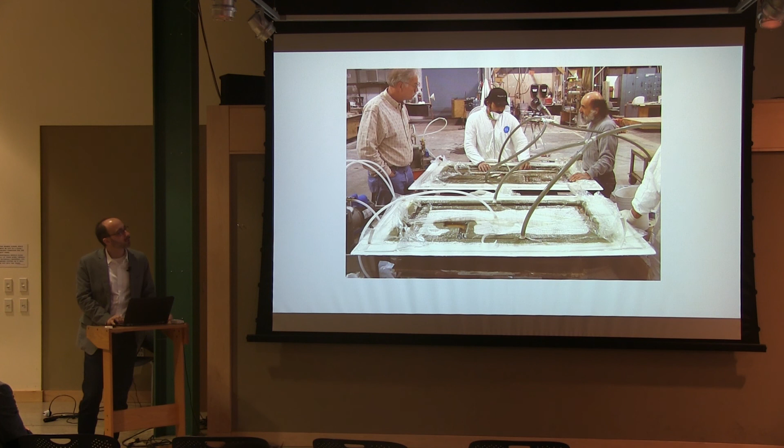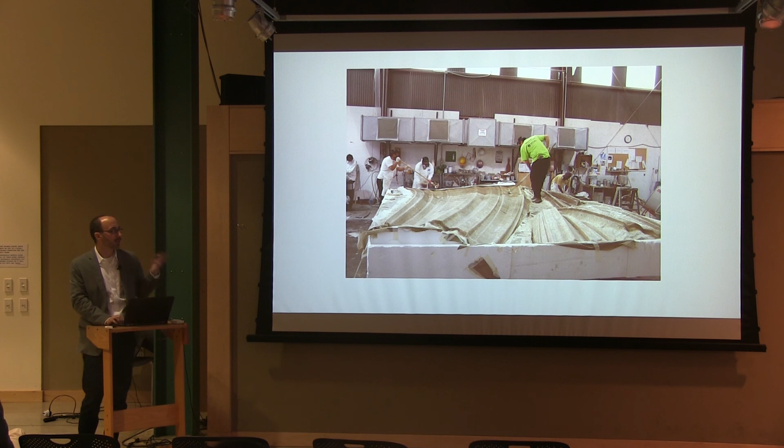But actually, most fiberglass composites are done this way, which is the resin is being applied using rollers and paint brushes, to mop up the extra resin till you can compact it, and it's really high touch. High touch and high tech, because the other thing is that you couldn't ever make these kinds of molds at this size if you weren't milling them. It's interesting that it's really this high tech kind of digital fabrication that is unlocking composites for use at scale.

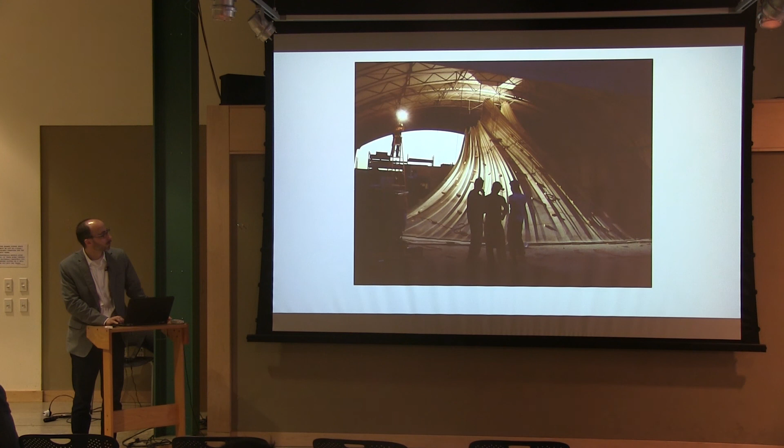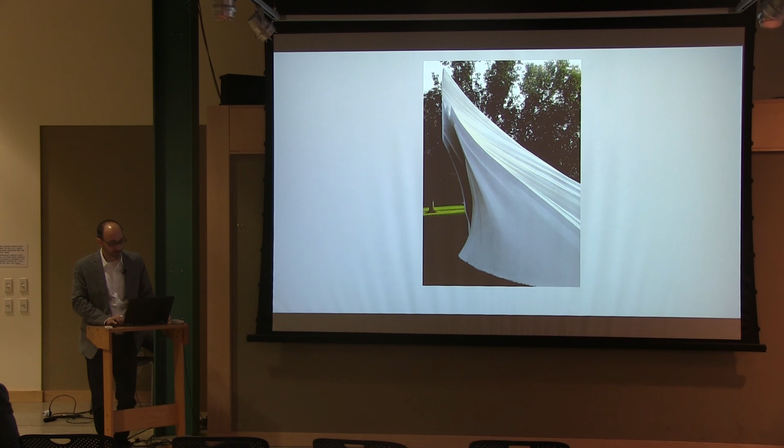And just some shots of the piece being put together, all these little tabs, like some kind of dental operation, fixtured in place until it was all seamed together. It had a post-applied stucco. The interesting thing about composites is you don't have to mold these perfect surfaces into them. You can do all sorts of stuff to them. So just finish with this. A couple shots of it installed.